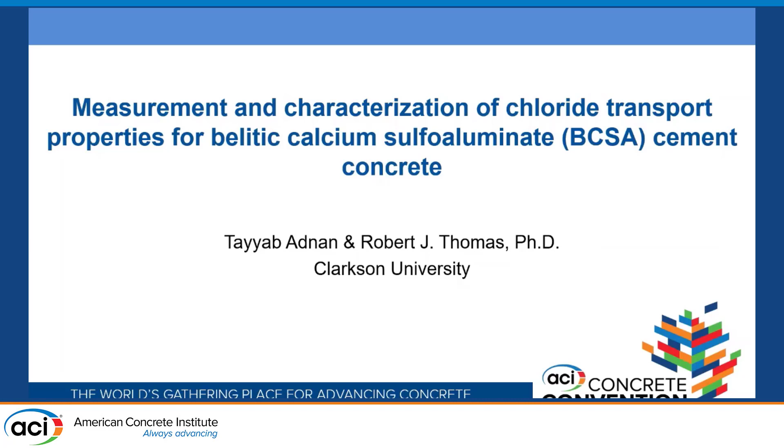So Belitic calcium sulfoaluminate cement is an eco-friendly cement. It has rapid strength gaining properties which are due to the extensive formation of ettringite as the early age hydration product. The image on the right shows the extensive formation of ettringite crystals after just 4 hours of hydration.

So this rapid strength gaining property is one of the reasons why BCSA has been used as a repair material in the US. But in recent years, the benefits of BCSA being eco-friendly and having rapid strength gaining properties have made researchers investigate its use in structural concrete. But we still need to have detailed knowledge on the strength and durability of this concrete. So more research is needed in that area.

And my research is specifically related to a durability property, which is chloride-induced corrosion. There are two issues we need to address in this category. First, there is limited literature available on the chloride corrosion and chloride studies of BCSA cement. And second, there is contradiction among the results. Some researchers say that BCSA has poor corrosion performance, whereas field investigation has shown no signs of corrosion even after 23 years of service life and despite being exposed to de-icing salts.

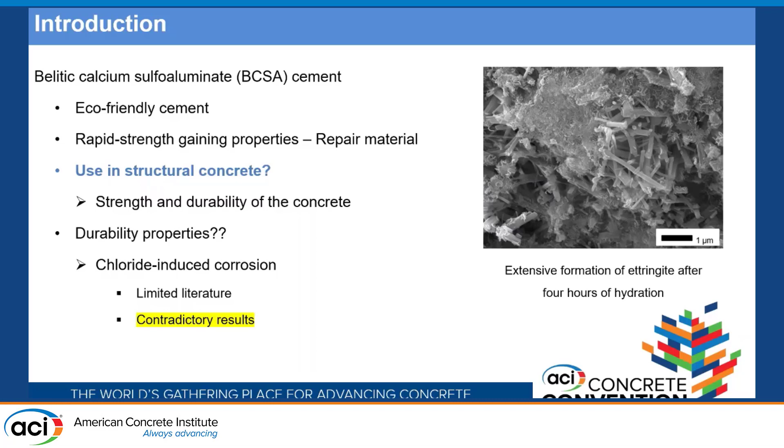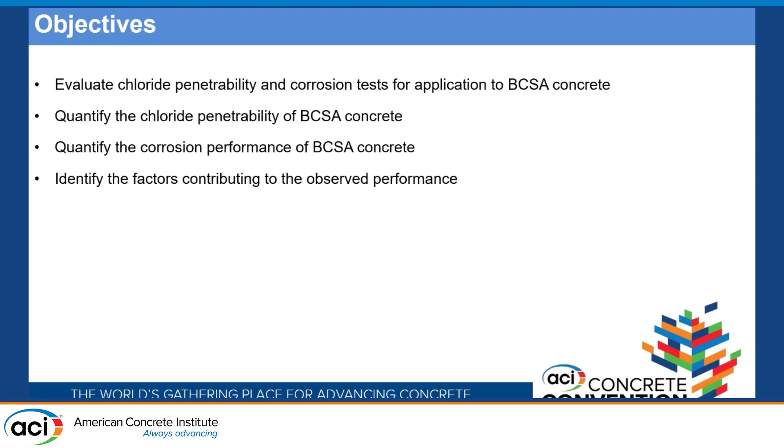So, the objectives of my research are, first, to evaluate chloride penetrability and corrosion tests for application to BCSA concrete. The second is to quantify the chloride penetrability of BCSA concrete. The third is to quantify the corrosion performance of BCSA concrete. And finally, to identify the factors contributing to the observed performance.

So for this study, I've used a range of water cement ratios for BCSA cement concrete, which gives me a 28-day strength ranging from 40 MPa to 70 MPa. And I also have a control mix with Portland cement, which has a target 28-day strength of 45 MPa. And for this study, I've used a range of test methods.

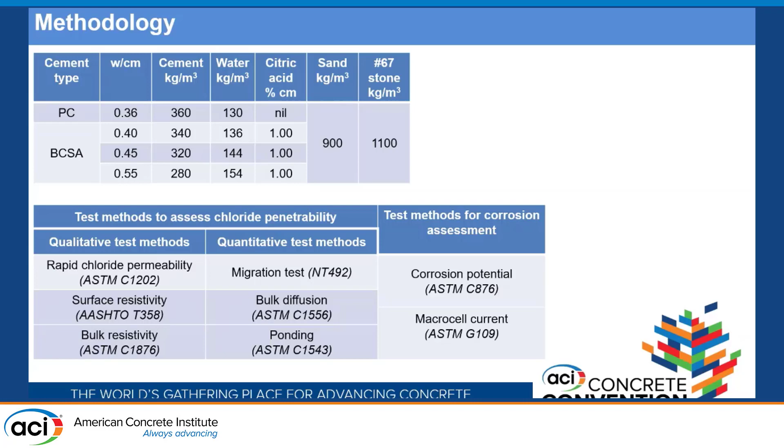So for the qualitative tests, I've used RCPT, surface and bulk resistivity. And for the quantitative test methods, I've used the migration test, bulk diffusion and ponding test. And finally, for the corrosion assessment, I've used test methods to measure the corrosion potential and the macrocell current. Let's start with the results of the qualitative test methods.

So for the RCPT, the test method gives you the amount of charge passed through the specimen in coulombs, and it also has a classification based on the charge passed, which shows the extent of chloride penetration. So here you can see that for BCSA specimens, overall the performance shows it has very low chloride penetrability.

Now let's move on to the results of the surface resistivity, where again you have a classification for concrete for the amount of chloride penetration based on the resistivity of the concrete. Here you can again see that BCSA seems to fall in the range of low to very low chloride penetration. So as far as we compare the results of RCPT and surface resistivity, they seem to be in agreement for BCSA concrete specimens.

But when we look into the results of the bulk resistivity, you see a contradiction. Here the resistivity has dropped and it seems to fall in the category of moderate chloride penetration. What could be the reason for this change in BCSA specifically? One possibility could be the specimen conditioning.

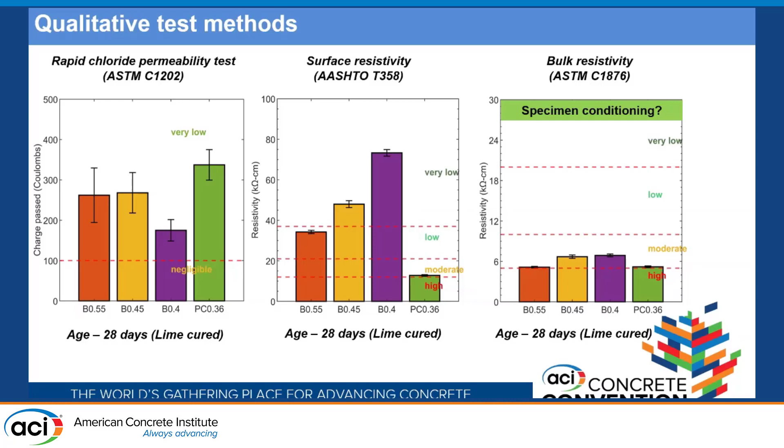Because if we go with the standards, it suggests that we need to immerse the specimens in a simulated pore solution, which contains calcium hydroxide, sodium and potassium hydroxide. And I've taken a statement from the code that this is done specifically to account for the alkalis that were lost in the curing process, even if you use lime saturated curing.

So when we look into the oxide composition of BCSA and Portland cement, you can see specifically that BCSA has low alkalis compared to Portland cement. One possibility is, are we introducing more alkalis into the pore solution and making it conductive, which is impacting the overall resistivity of the concrete itself? That's something we need to further study and investigate.

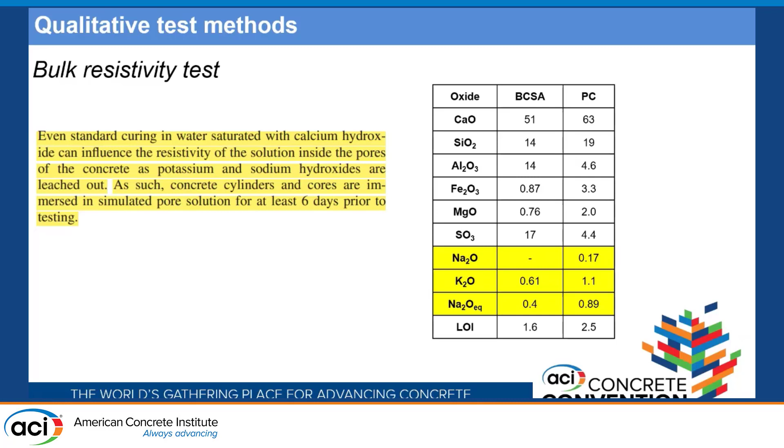Now let's move on to the results of the quantitative test methods. The first one is the migration test, which gives you the value of migration coefficient. A low value of migration coefficient is good in terms of having low chloride penetrability. So you can see that BCSA specimens seem to have a reduced migration coefficient as the water cement ratio reduces. So that's good.

But when we look into the results of the bulk diffusion and ponding test, we see a sharp contradiction. Here you can see that the values are significantly higher, and specifically if we look into the result of 0.4 water cement ratio for BCSA, so B0.4 is BCSA with 0.4 water cement ratio, you can see that in one case, bulk diffusion, it has a very low diffusion coefficient, but in the ponding test it is totally opposite, it's very high.

So one thing we need to look into specifically is the duration of the test method. For the migration test, the test period is 1 to 3 days, but for the bulk diffusion test it's almost 60 days in my case. Okay, the minimum should be at least 56 days.

And for the ponding test you have a duration of 90 days. One thing with BCSA cement is that it hydrates at later ages as well. So you have a cement that is hydrating, and that seems to have an influence on the diffusion coefficient.

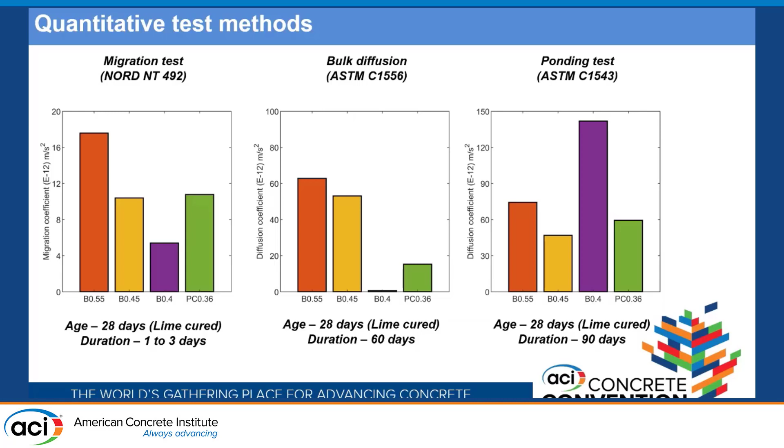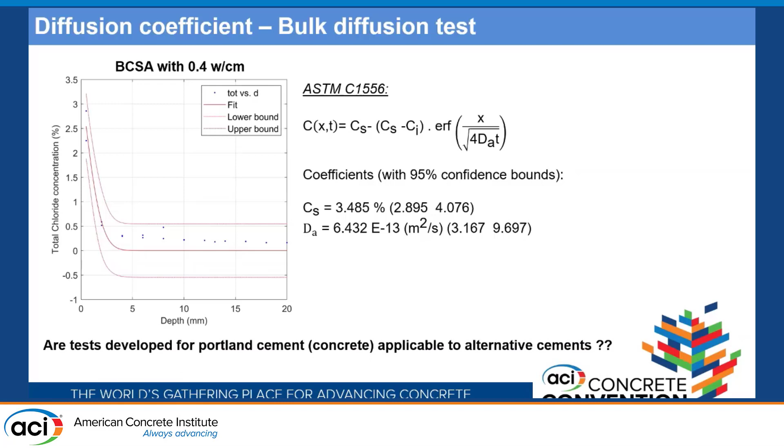So with this I would like to raise a very important question, which is, are the test methods developed for Portland cement concrete applicable to alternative cements? With this thought, let's move on to the results of the corrosion assessment, where I've used G109 specimens to study both the corrosion potential and the integrated macrocell current.

And for this study, I've used two batches. The first batch consists of BCSA with different water cement ratios, but the same curing period. And for the second batch, I've used just one water cement ratio of BCSA and then modified the curing period.

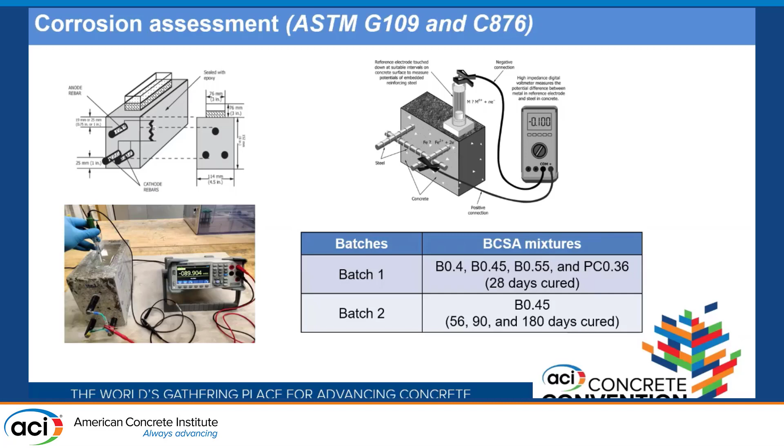Let's start with the results of batch 1. For the macrocell current, you can see that the integrated macrocell current is comparatively much higher for BCSA, and if we compare it with the cycles of exposure, it is crossing the limit specified by ASTM at just one cycle of exposure, and it keeps increasing.

Now when we look into the corrosion potential based on ASTM C876, you can again see that BCSA specimens have very low corrosion potential, very negative, and based on the classification, this falls in the category of high probability of corrosion, which means 90% probability of corrosion, and low probability means 90% probability of no corrosion.

Since the values were very high with just one cycle of exposure, I took out one of the specimens from the lot and autopsied it to see how the rebar looks. So the steel rebar looks like this. For all BCSA specimens with just one cycle of exposure, there seems to be a lot of corrosion of the rebar. The only difference is that as the water cement ratio reduces, it seems to have a slight impact on the corrosion of the rebar itself.

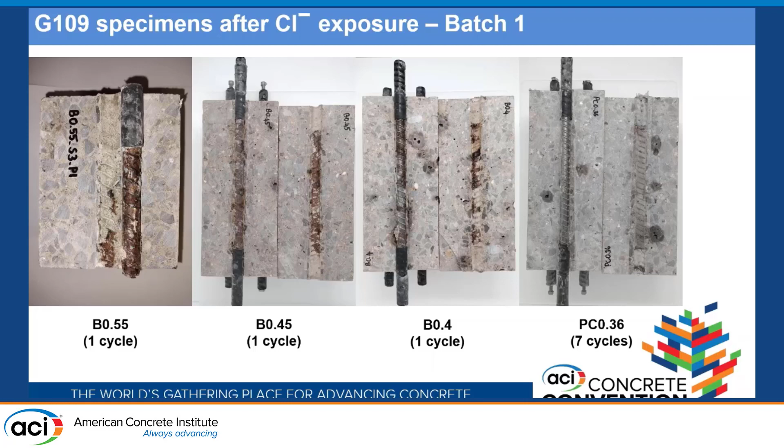But if you see the Portland cement, which was exposed for 7 cycles, it still has no corrosion going on. So now let's move on to the batch 2 results, where I've changed the curing period. You can see that the macrocell current, the blue line, indicates the value for 28 days. And as I increase the curing period, these values fall within the limit, up to 5 cycles of exposure. That is the duration that I tested the specimens for batch 2.

And also for corrosion potential, you can see that 28 and 56 days fall in the category of high probability, whereas with 90 and 180 days of curing, it changes to a region of uncertainty and finally to low probability of corrosion, 90% probability of no corrosion.

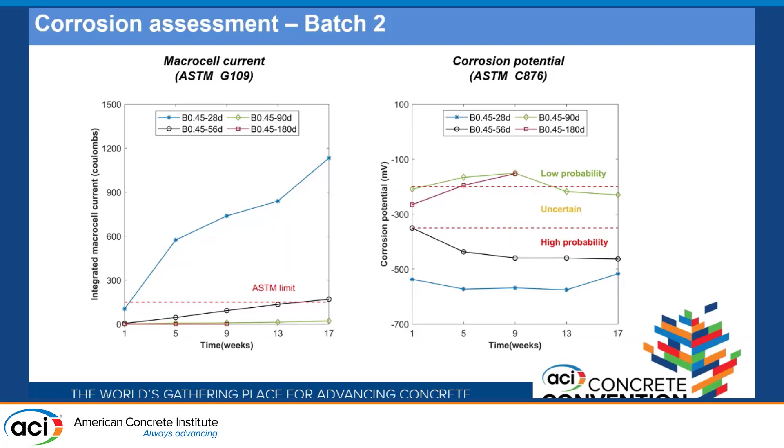So after 5 cycles of exposure, I autopsied all the specimens, and this is how it looks. The first one was with just 28 days of curing and just 1 cycle of chloride exposure. The other ones are with 5 cycles of exposure and 56 days and 90 days of curing. You can see that there is significant improvement in the corrosion performance. There is comparatively much lower corrosion here.

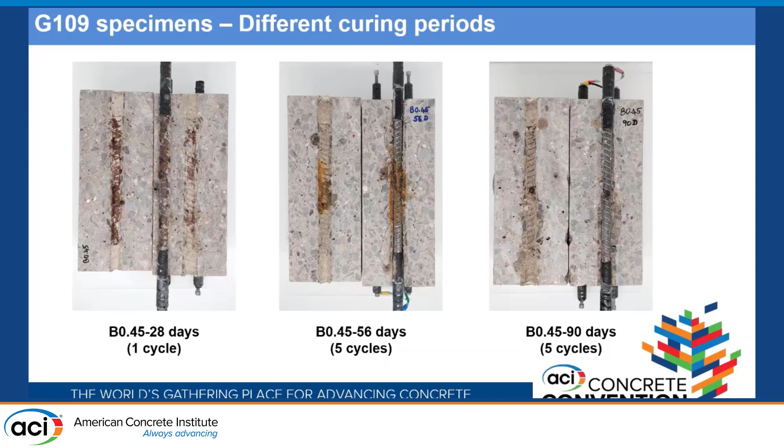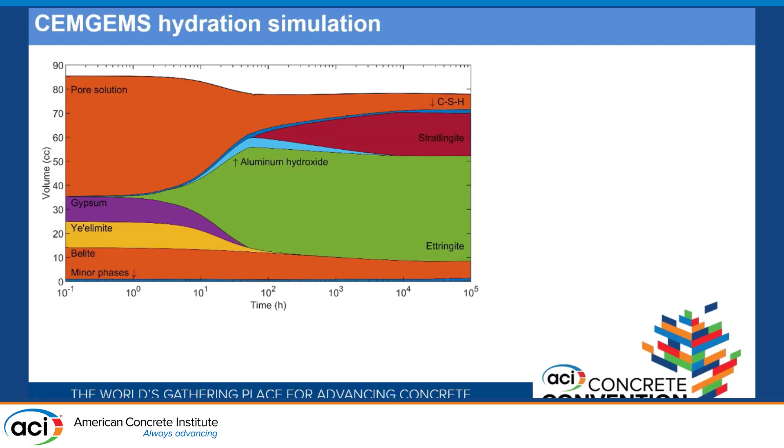Now, I would like to share a simulation that shows the possible hydration of BCSA cement. BCSA, as I mentioned earlier, has late age hydration as well, because it also contains belite, and it hydrates to form mostly strätlingite and some amount of C-S-H. Based on the results we have observed, these products seem to provide significant late age microstructure refinement for BCSA cement, and they also increase the late age pH, which is extremely important for steel passivation.

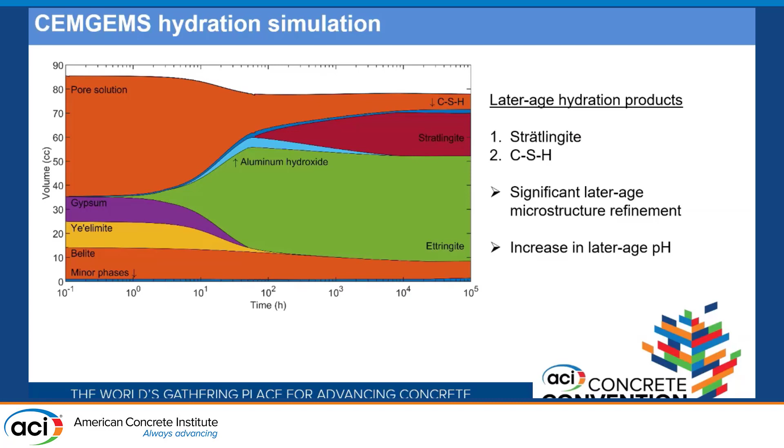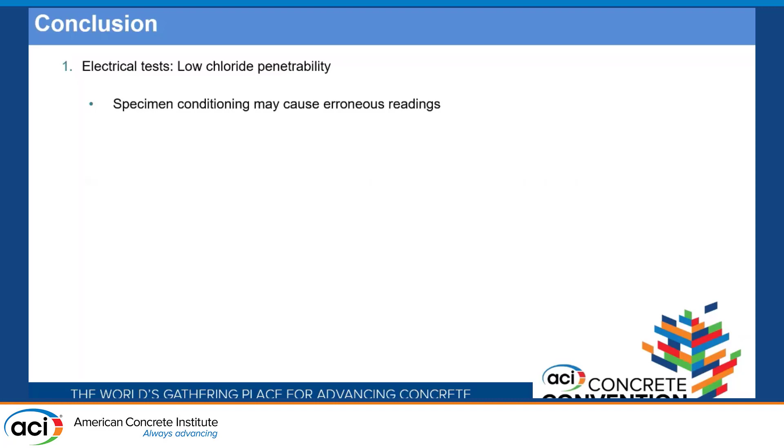Finally, I would like to conclude that the electrical tests show low chloride penetrability. However, specimen conditioning may cause erroneous results, as we observed for the bulk resistivity test. The second is that the migration and the diffusion tests show contradictory results for chloride penetrability of BCSA cement. The third is that the corrosion performance of BCSA cement improves with curing age.

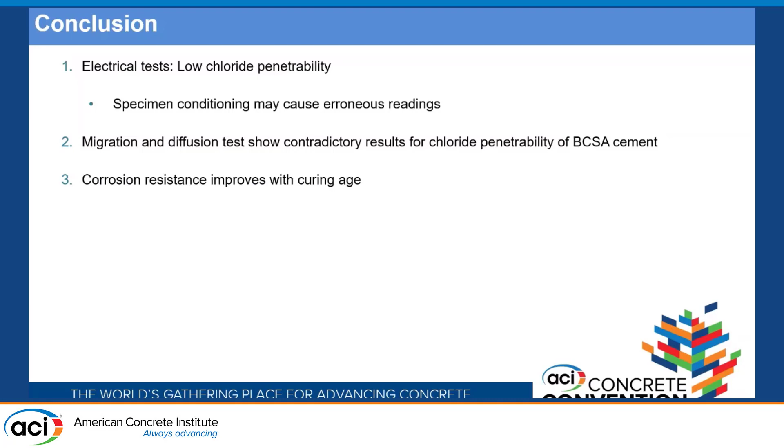And finally, my future work will be to further study the time dependence of chloride penetrability and the time dependence of steel passivation, and finally to work on a corrosion service life model for BCSA cement.